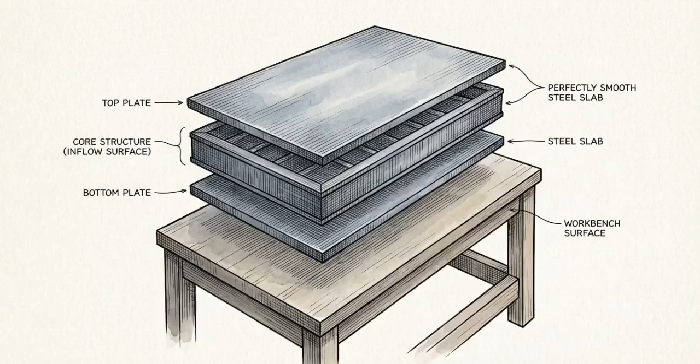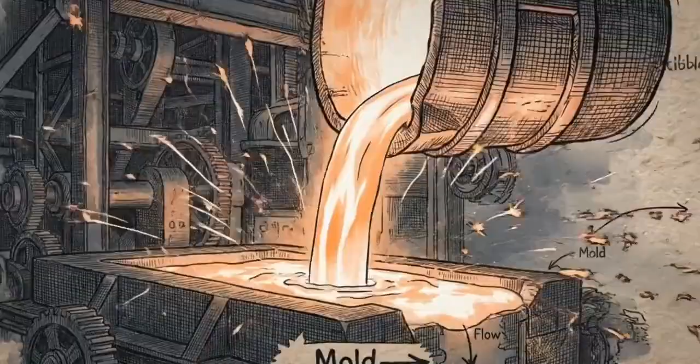Pure, processed metals like steel are thermodynamically unstable. Because of the massive amounts of energy injected into them during the smelting and manufacturing process, these metals exist in an artificial state. They constantly seek to release that stored energy and return to their most stable, oxidized form found in nature. Compare the pristine, engineered surface of a modern steel hull to raw iron ore. The ore is the baseline.

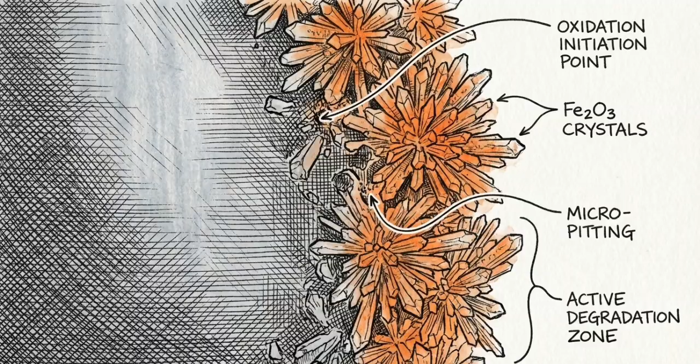What we commonly observe as rust is an active thermodynamic imperative triggered by environmental exposure. It is the metal executing a physical drive to break down. Launching a steel ship into the ocean initiates a massive, inevitable chemical countdown. From the moment the hull touches the water, the vessel begins returning to its native ore state.

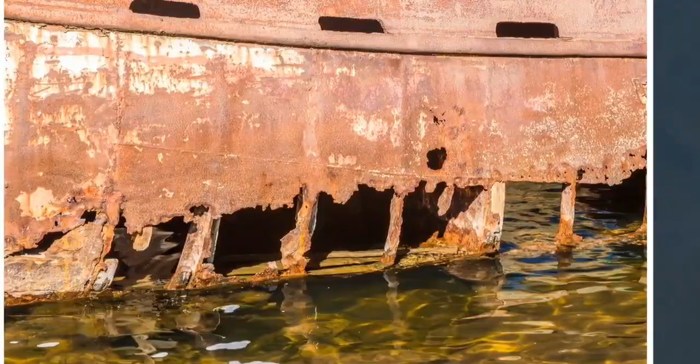Ships are among the most complex engineering structures built by humans, and they operate continuously in the Earth's most aggressive natural environment. The direct physical consequence of this thermodynamic drive is the literal dissolving of the ship. Iron atoms detach from the structure, leading to severe reductions in hull thickness and critical structural weakening.

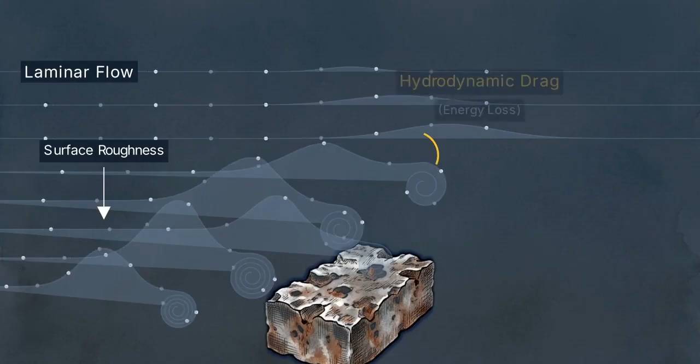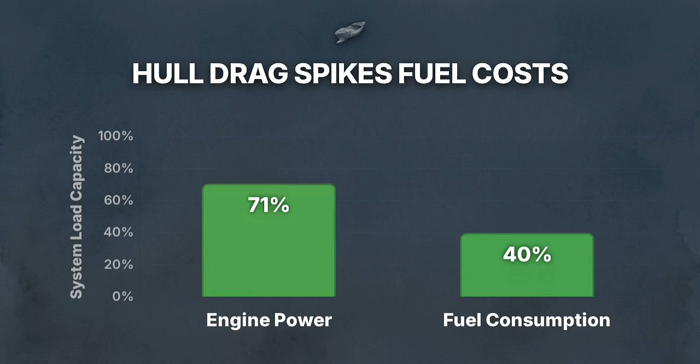There is a secondary hydrodynamic consequence. The byproducts of this degradation create highly rough surfaces that disrupt fluid dynamics around the vessel. This surface friction directly increases hydrodynamic drag. To maintain speed, the ship requires significantly more engine power, resulting in massive increases in fuel consumption.

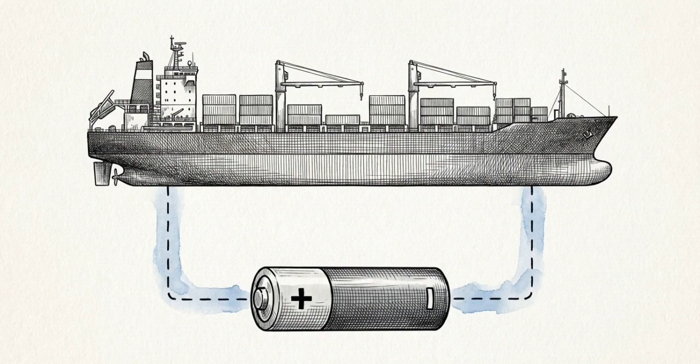The global shipping industry spends billions of dollars annually on dry dock repairs to replace this lost metal. For naval warships, this exact process compromises mission readiness and introduces severe safety risks. To stop this destruction, engineers must map and deconstruct the continuous electrochemical circuit driving the decay. Treating the visible surface symptoms achieves nothing. Mitigating marine damage requires analyzing the ship's hull as a functioning microscopic battery.

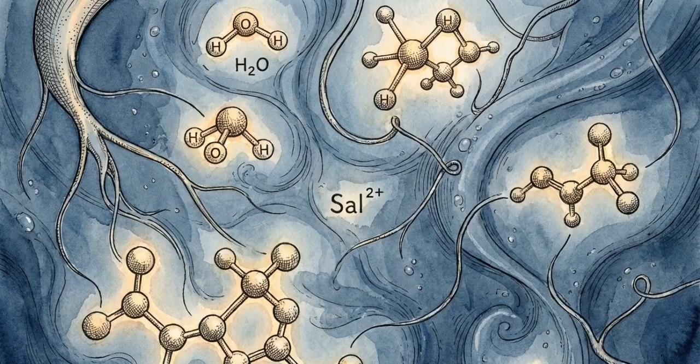The first essential component of the marine corrosion cell is the electrolyte. An electrolyte is a conductive medium that allows ions to move freely. Seawater is a highly conductive liquid due to its specific chemical composition. Seawater contains high concentrations of dissolved salts, specifically sodium chloride. These salts act as the primary agents that facilitate unimpeded electrical current flow through the water.

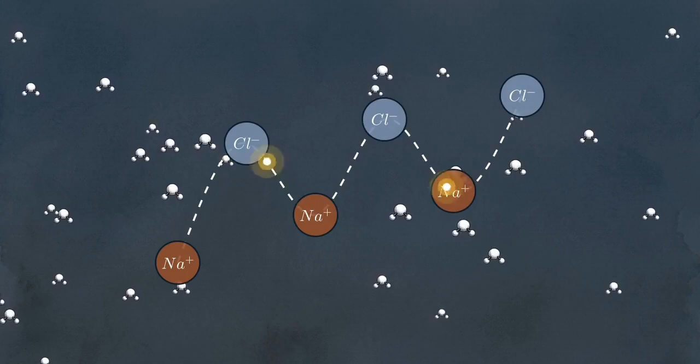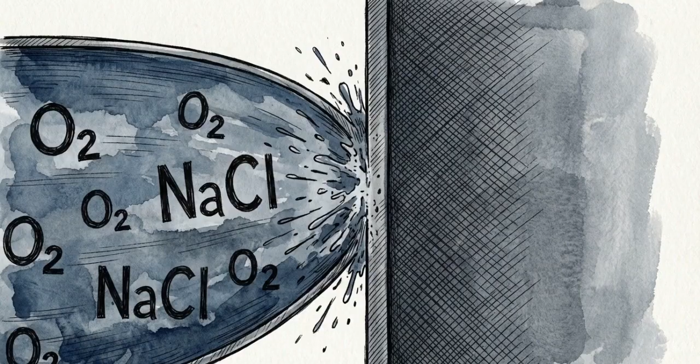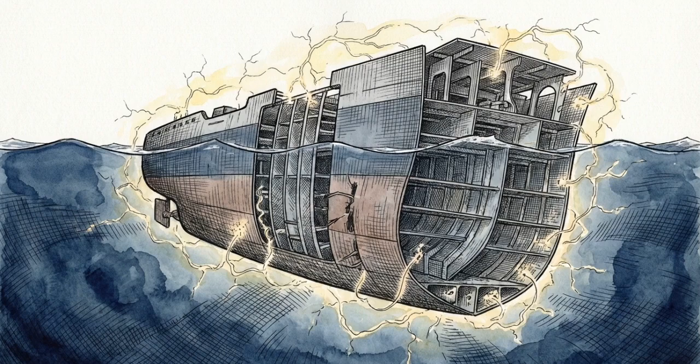The second critical ingredient suspended in seawater is a vast quantity of dissolved oxygen. Physical ocean dynamics, specifically ocean currents and constant wave motion, act as a mechanical pump. They continuously deliver fresh oxygen and salt ions directly to the metal surface. Temperature variations further dictate the speed and intensity of these reactions, with warmer waters generally accelerating the electron transfer. The ocean operates as a highly conductive, oxygen-rich chemical bath specifically optimized to accelerate electrochemical reactions.

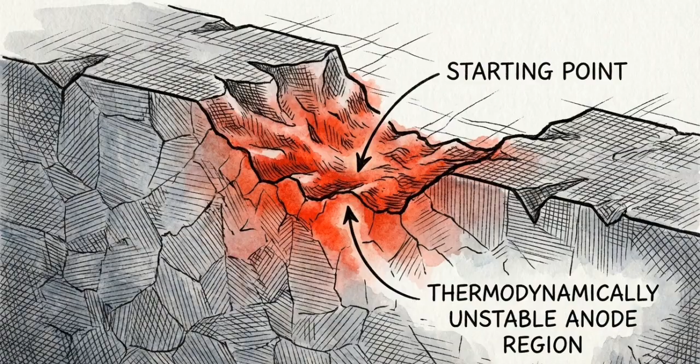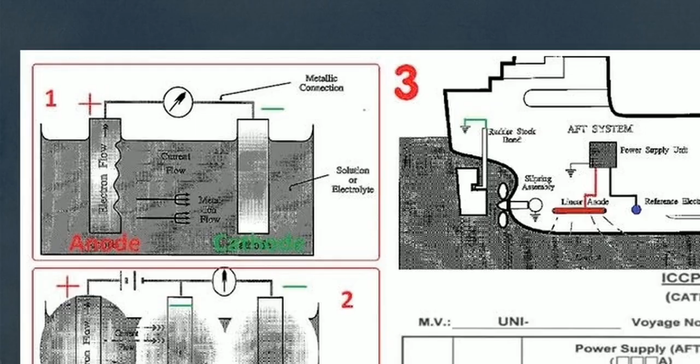Zooming into the atomic level of the steel hull reveals the specific starting point of this degradation, the anode. The anode is the precise region on a metal surface where thermodynamic instability forces metal dissolution to occur. This schematic outlines the four mandatory elements of a natural corrosion cell: an anode, a cathode, an electrolyte, and a metallic path. At the anode, iron atoms break apart.

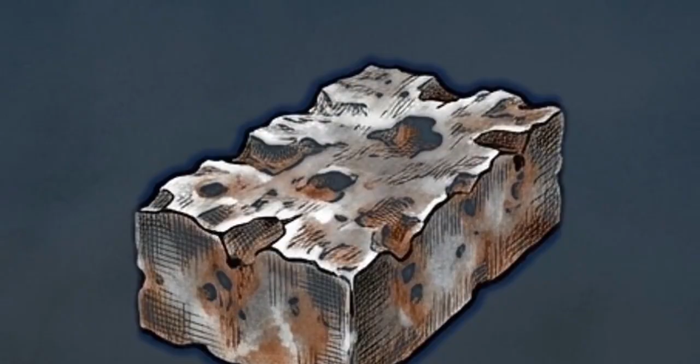The reaction is Fe → Fe²⁺ + 2e⁻: an iron atom yields an Fe2+ ion, plus 2 liberated electrons. The iron atoms dissolve into the seawater as positively charged ions. This atomic departure is the literal physical definition of hull corrosion and metal loss. Anodic dissolution is the definitive engine of structural degradation, permanently stripping mass away from the vessel.

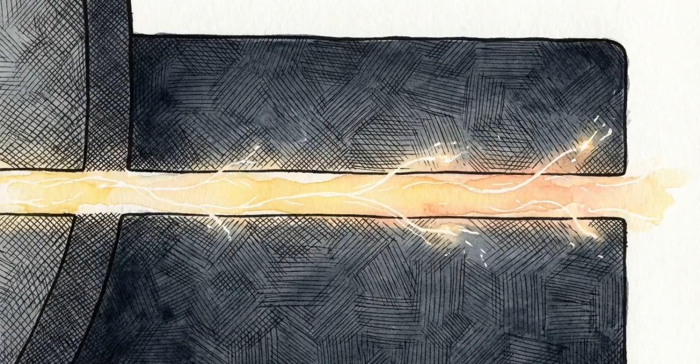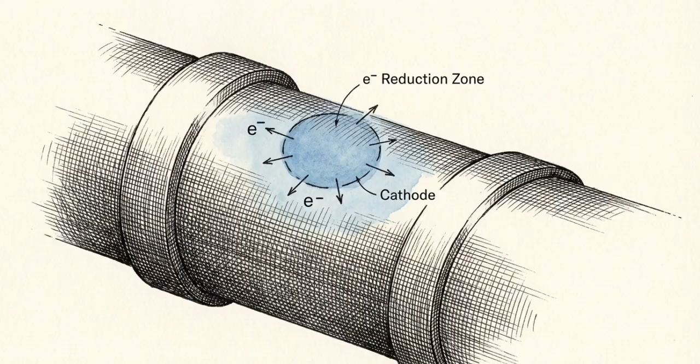The newly liberated electrons do not enter the water. They require a new destination. The ship's steel hull itself acts as the metallic path, the required conductive conduit that allows this internal electron flow to continue. These traveling electrons move through the hull toward the third component of the cell, the cathode. The cathode is the specific location on the metal surface where reduction reactions occur. Reduction reactions are chemical processes where atoms or molecules gain electrons.

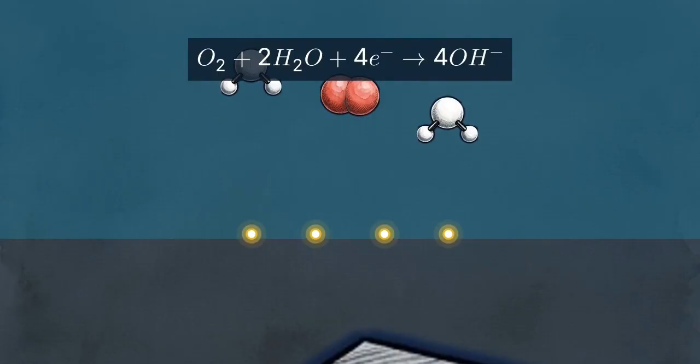When electrons reach the cathode, the reduction reaction is oxygen plus 2 water molecules plus 4 electrons yields 4 hydroxide ions (O₂ + 2H₂O + 4e⁻ → 4OH⁻). This consumes electrons and produces negatively charged hydroxide ions in the water. Critically, the cathode does not dissolve. It experiences zero metal loss.

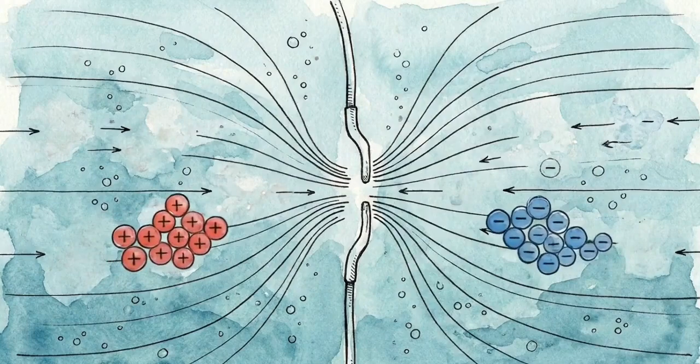Keeping the battery running requires closing the circuit via ionic flow. The newly created positive iron ions and negative hydroxide ions migrate toward each other through the conductive seawater electrolyte. Electrons flow through the solid metal, and ions flow through the seawater. Together, they form a perfect, self-sustaining electrochemical engine.

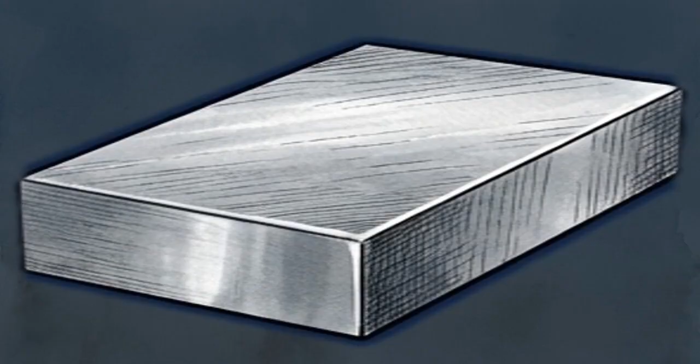Scaling this perspective back up from a single microscopic reaction to the macroscopic structure of a naval vessel reveals the true scope of the problem. A massive steel hull in the ocean does not contain just one corrosion cell. It hosts millions of microscopic batteries operating simultaneously. Slight variations in the steel's metallurgy, localized water temperature, and oxygen exposure cause different regions of a single continuous hull plate to naturally differentiate into competing anodic and cathodic areas.

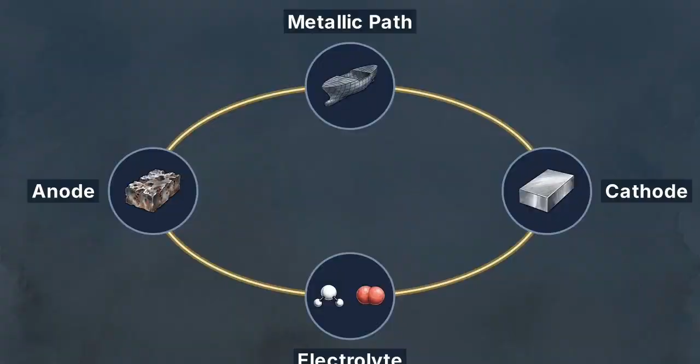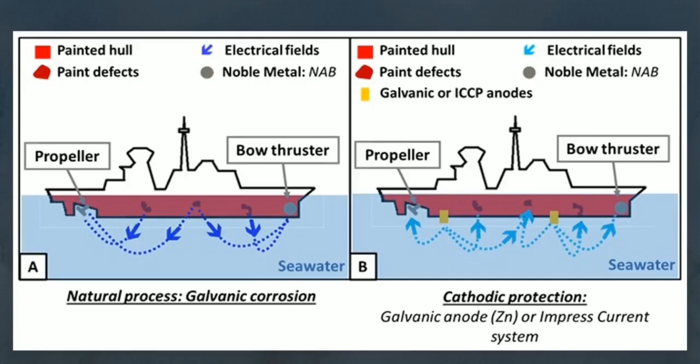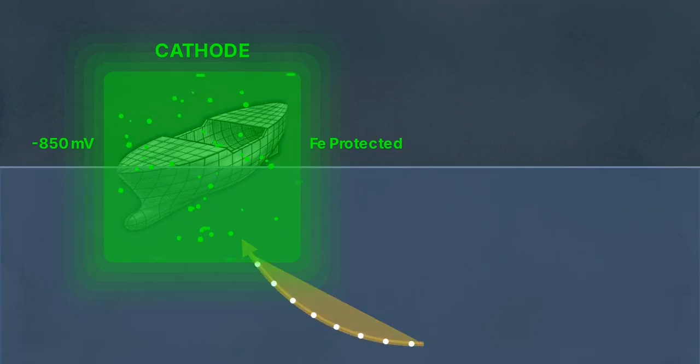Since the physical components of the circuit cannot be removed, the electrochemical behavior of the metal itself must be artificially overridden. Survival requires pumping a controlled electrical current backward into the system, forcing the entire hull to behave exclusively as a cathode. This technique is known as impressed current cathodic protection, and it is the subject of Lecture 2.